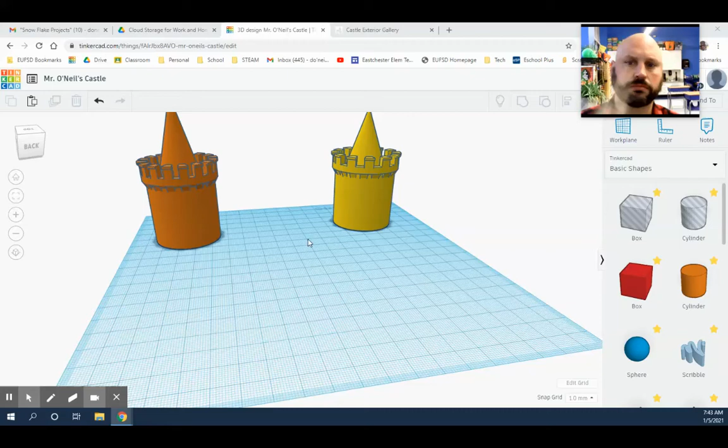Today I'm going to teach you how to make this castle, at least the first part of it. This is what it looks like in Tinkercad, and this is what it could look like. There are different variations, but I'm going to teach you how to make this one.

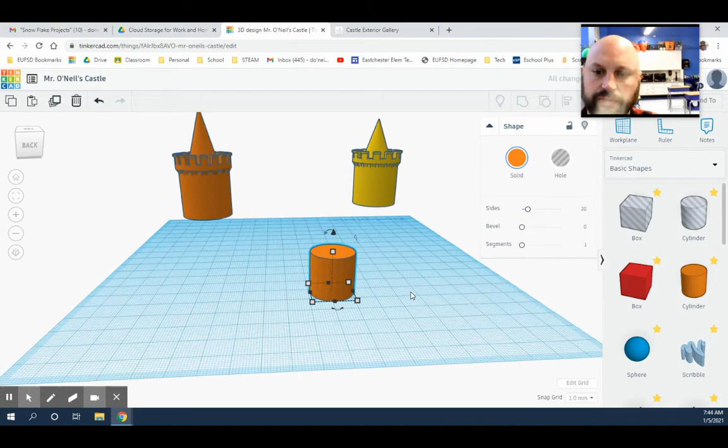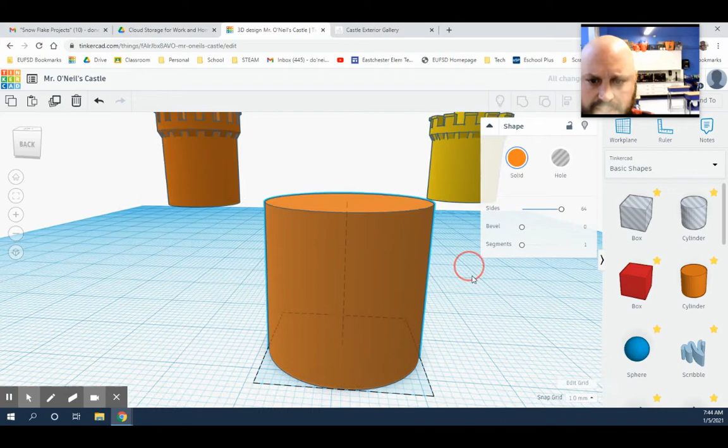First we're going to start out with a cylinder. As I've mentioned before in class, if you look closely, it's not really a cylinder, it has sides. This is actually a 20-sided shape. Since Tinkercad works with an XY axis, it does not have anything that's 100% round. So I'm going to adjust this to 64 sides, and you can see it's starting to look more like a cylinder.

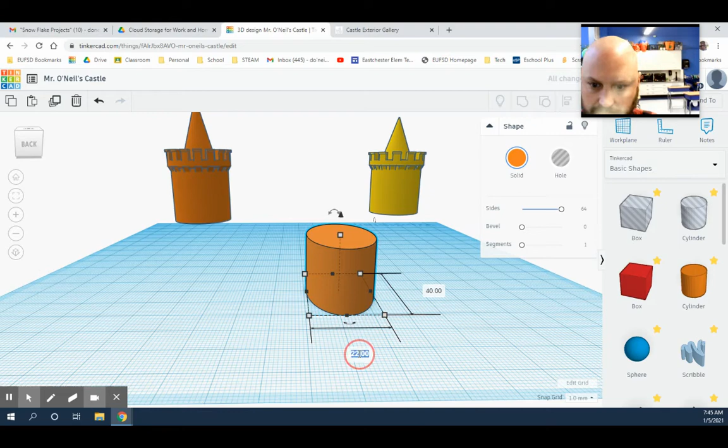The first thing I'm going to do is change my size to 40, 40, and a height of 40. Remember, you can also do that by holding your shift button. If I undo all that, I can hold shift down and pull the corner until it gets to 40, and that will also adjust the height to 40. But you have to make sure you are holding that shift button down.

So that's how we're going to start with this piece right here. That's going to be the base of our castle.

First thing we're going to do is duplicate it. You can do Control-D to duplicate, or hit the duplicate button. Drag this piece out, and we're going to turn that one into a hole. Since this is 40 by 40 by 40, the same exact size as this one, we're going to bring this down to 36. I'm holding shift down on my keyboard and lowering it carefully to 36, then letting go. I'm also going to raise it up right here, the height. I'm going to bring that up, and you'll see why later.

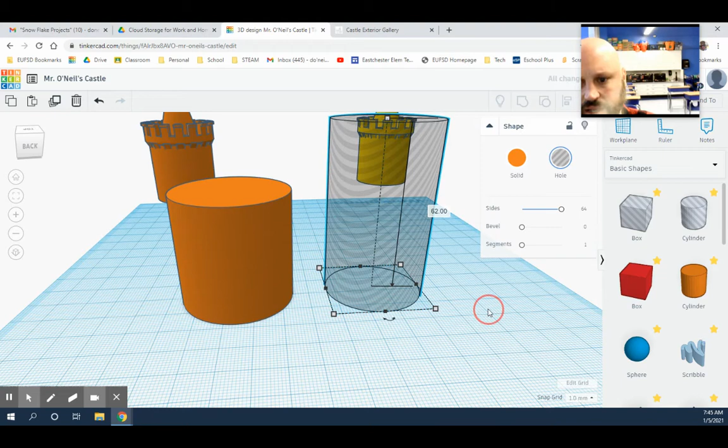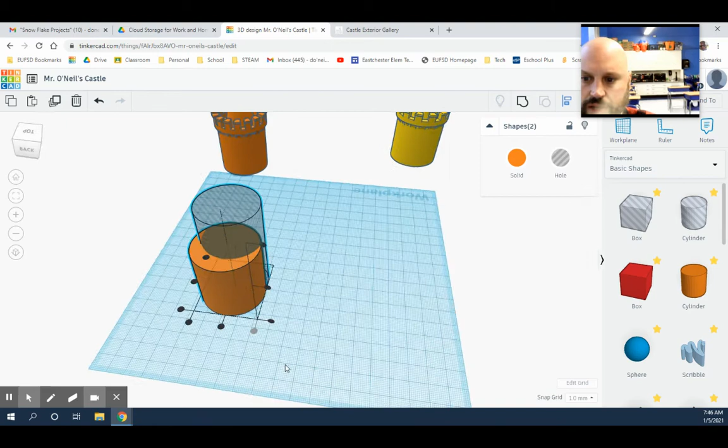Since I want to keep a floor on this, I'm going to raise this off the work plane. I'll go over to my black triangle and raise it up 2 millimeters. Now I'm going to align these two. I'll rotate my bed, highlight both, hit my alignment tool, and hit the buttons in the middle, here and here. Now I'm not going to group them yet, I'm going to leave this over on the side.

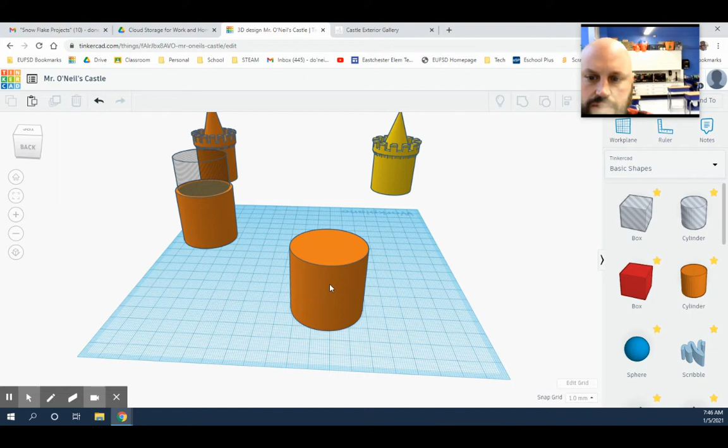But I am going to duplicate one more of those cylinders, so I'm going to bring out one of these. If you want to start with a new cylinder, that's fine too, but you can simply click on this one and duplicate it. I'm also going to duplicate this a second time, so we need 2 more cylinders for this next part.

So this is the base, and we're going to use these 2 cylinders to make the balcony. When you look back at this castle, you can see the balcony is here - there's room for the soldiers of the troops to look down to protect the castle. These little pieces holding up the balcony are called corbels. We're going to also make those.

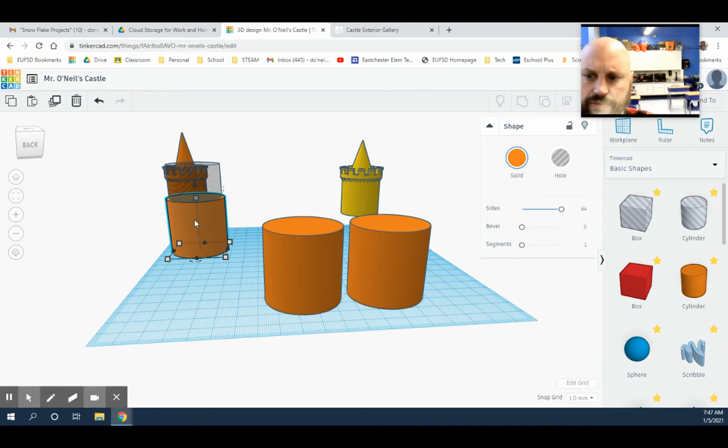Okay, so let's first start with the balcony. The balcony needs to be a little bit bigger than the base. So if the base is 40 by 40 by 40, we're going to make this 44, and bring the height down to 10. So we have a height of 10, and the sides are 44 by 44. If you need to pause the video at any time to work on yours, that's fine.

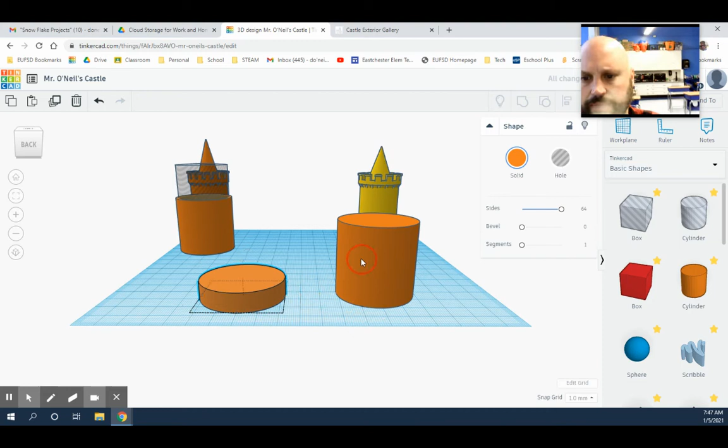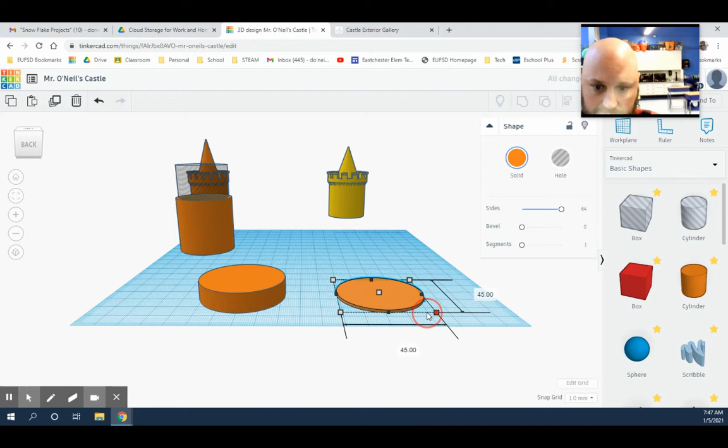Now the cap - these little pieces jutting out from the balcony, this little trim, this rim - that's going to be this piece here. We're going to bring this down to 1. If this is 44, we're going to make this 46, and I'm going to have to readjust that to 1. Actually I should have done that second. So this one is 46 by 46 by 1.

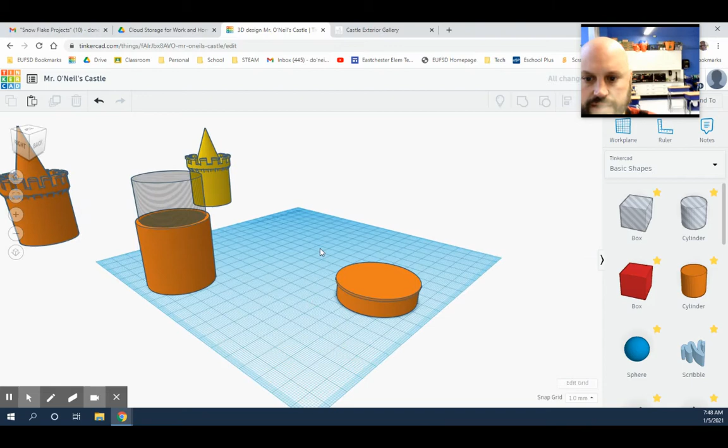Now since this is a height of 10, I'm going to raise this up to 10 - you can see the 10 there. I'm going to place this on top, and align it because I don't know if I can do it by eye. Well, it looks like I did - wow, I got lucky there. But normally you're going to have to align that. It somehow just went right on top. Now you can group it if you need to move it around, so I'm going to group it just so I can move it.

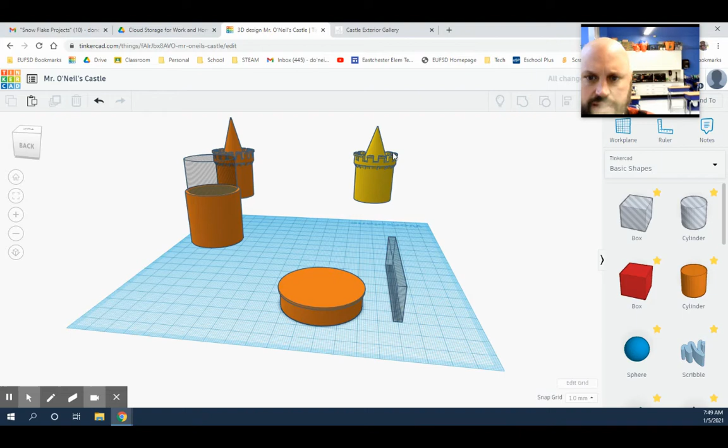And now here's the cool part - I'm going to cut these sections out using my duplicating trick. I'm going to pull out a clear box, and do a length of about, I think, 70 works - it doesn't have to be exactly 70. And then a width of, let's say, 4, because I want to make a lot of those little slits there. Oh, I turned it by mistake. Okay, let's bring that into 4.

Okay, and you notice I'm using the black boxes there to pull it in. If you use the black boxes, you can adjust the width or the length without affecting the other measurement.

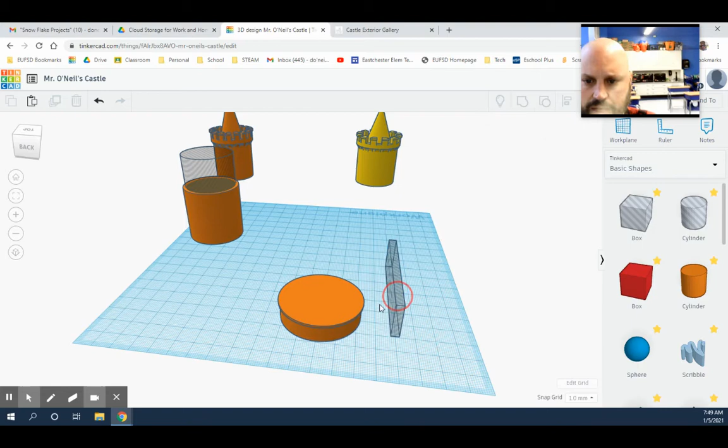Now the important thing here is I want to get this directly in the middle. So when you look down, it needs to be a perfect fraction. If you do it like this, it's not going to work. So let's use our alignment tool right here.

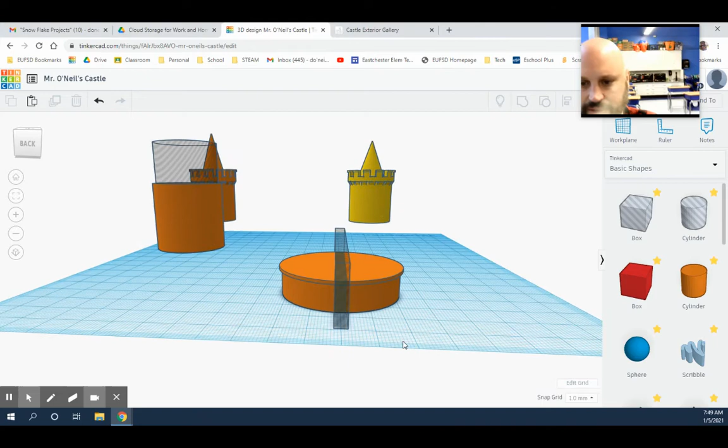Let's make sure that rectangle is exactly in the middle of the circle. And it is. Okay, so now here comes our duplicating trick. Well, wait, one more step. I have to raise this off the ground, because if you see here, I still have a big chunk at the bottom. So I'm going to raise this up 4.

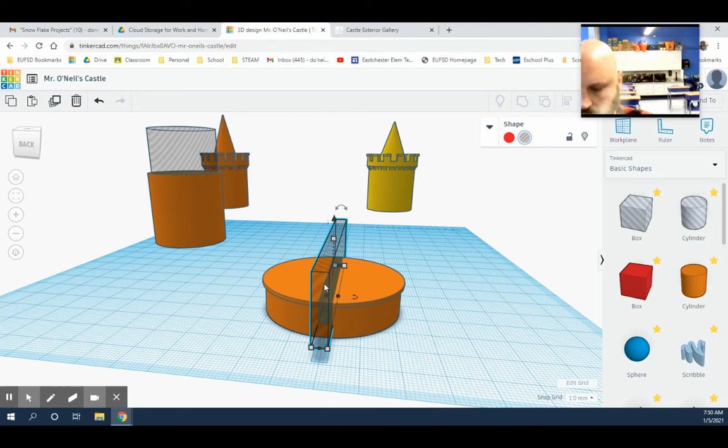Okay, and you can see when you look at it that it's leaving the bottom, it's just cutting the top. So I am going to hit Control D, or the duplicate button, and then I am going to rotate 22.5 degrees, which is the first turn. And then I'm going to hit Control D again and again and again, and it gives me this really cool design. It follows the same pattern.

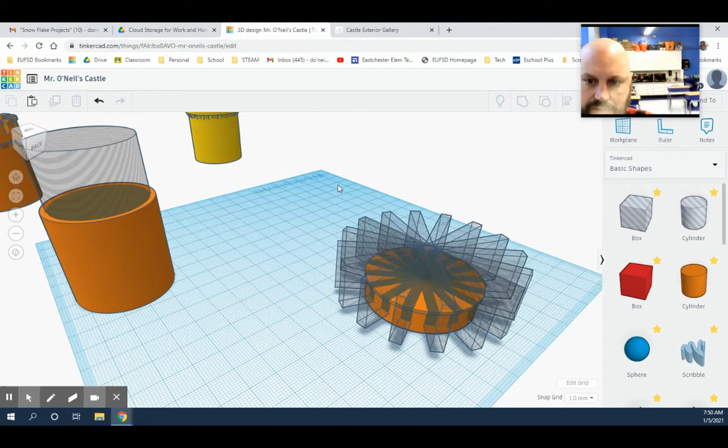Now what's left to do is group it. So let's highlight this and hit group. And bam. All right, now you'll see why I left this piece here.

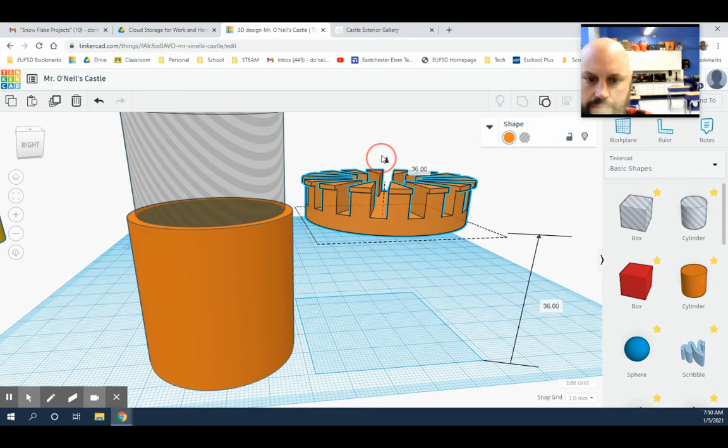Okay, I'm going to bring this over. And remember, we said that this was a height of 40, so I am going to raise this up 40. Okay, that's raised up 40.

I'm now going to bring this in, and of course, align it. Don't do it by eye. Hit your alignment tool. You're going to click here, and you're going to click here. And then you're going to group.

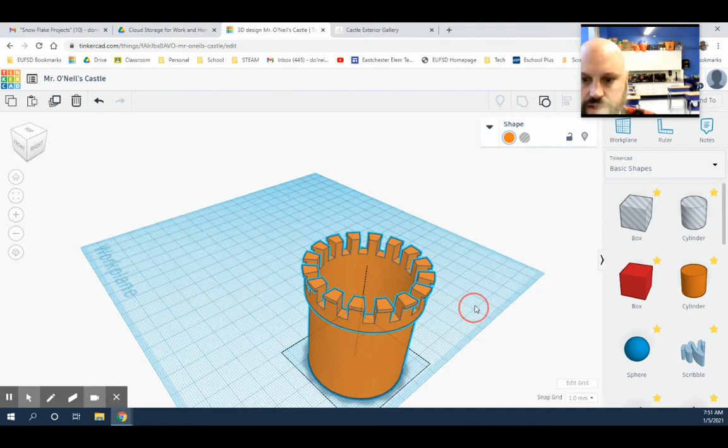And you're going to see that now this circle really carves out the inside that we needed. Okay, now only one problem: your soldiers have no place to stand. And our balcony, if we were to 3D print this, has no supports. If this was a real structure, your balcony would fall down.

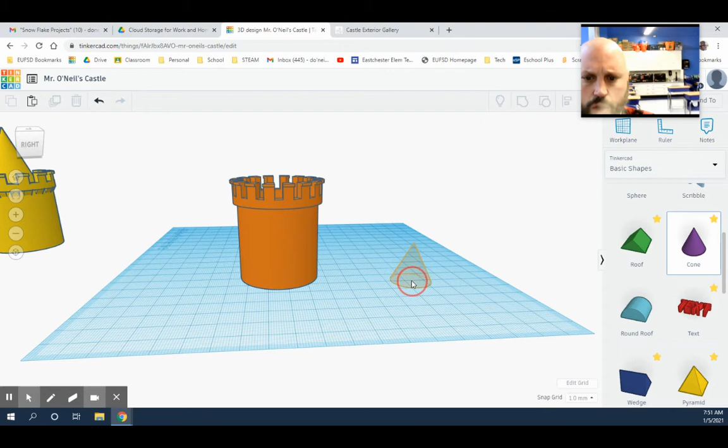Excuse me. So here's how we're going to make the corbels and the floor at the same time. We're going to bring out a cone. Now, just like the cylinder, you can adjust the sides of a cone to make it smoother. I'm going to make it 64.

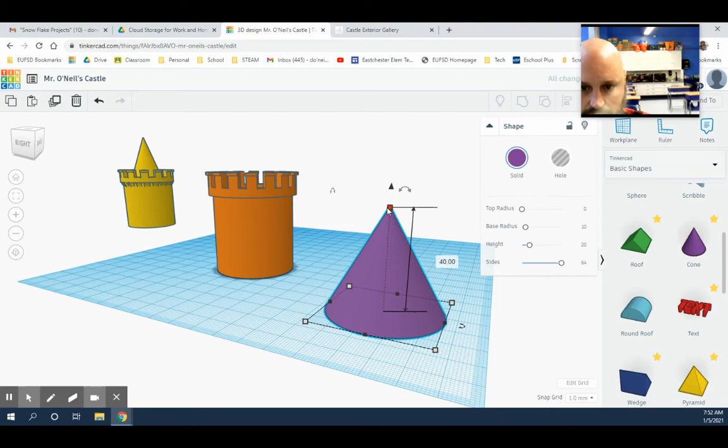Now, the corbel should be the size of the balcony. And if you remember, the balcony size was 44 by 44. But we're going to keep the height at 40. Again, this cone is 44 by 44 by 40. Okay, if you need to pause the video to do that, go ahead.

We're now going to flip 180 degrees. Now you can do this manually, or you can click on the arrows and type into the box 180 and hit enter, and it flips it over a complete half turn.

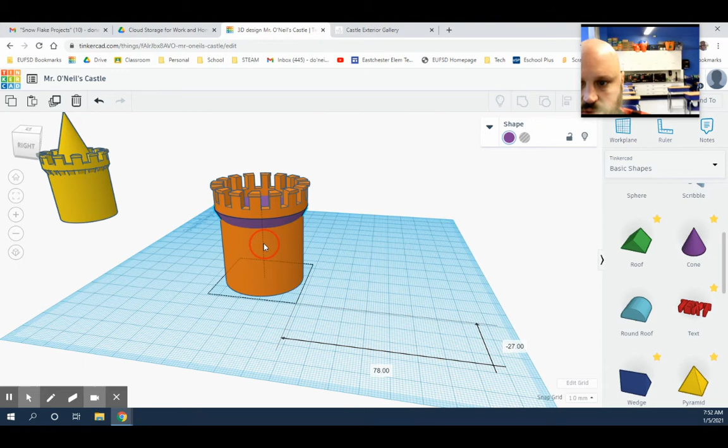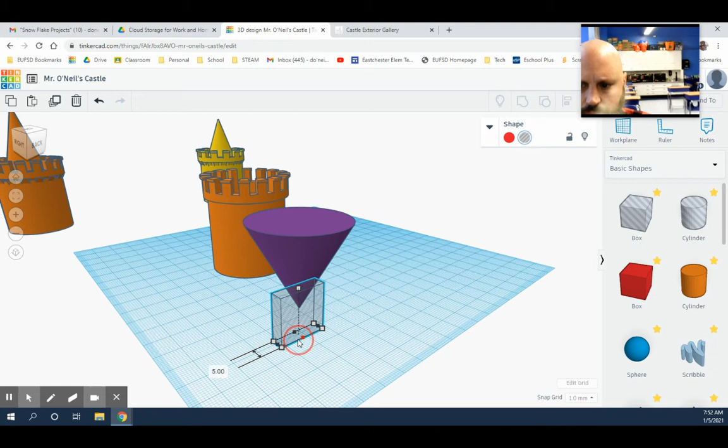So here's what we're going to do. We're going to use the same trick. I'm going to bring out a box. I'm going to again adjust the width to about 5, and I'm going to adjust the length to about maybe 70.

Now what I'm going to do is align it directly in the middle of this cone, right here and here. And you can see it's directly in the center, and that's really important.

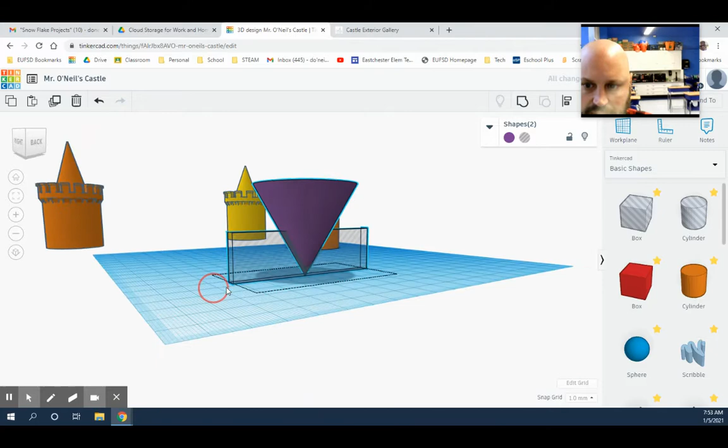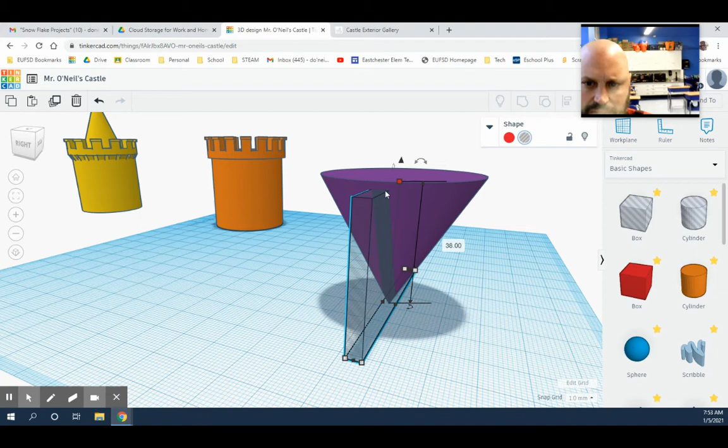I'm going to leave that on the ground, but I'm going to raise the height, and I'm going to raise it to right underneath the floor. I want to leave some of the floor, but cut most of this off. The height is up to you, but I'll tell you my height there is 38. So if it's 40 high and this is 38, that means I have a 2 centimeter or 2 millimeter floor, which is fine.

All right, so click here, Control D to duplicate, turn 22.5 degrees, and then hit Control D again and again and again until you go all the way around.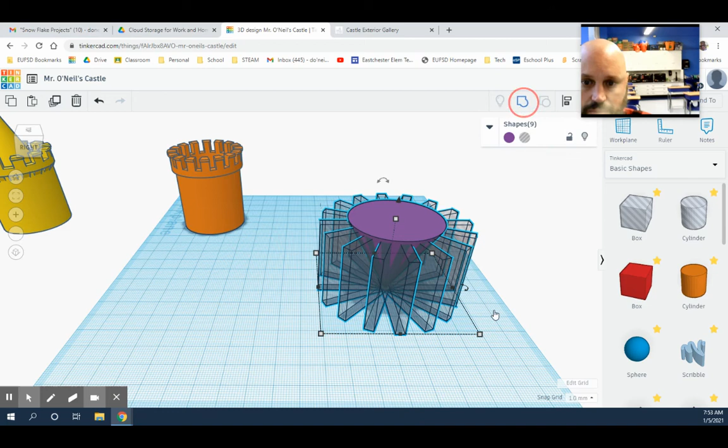All right, now I'm going to highlight these and group, and I'm left with this really cool looking shape.

Now, watch what happens when I align them. I'm going to click here and here. Oh, I missed that last one. Right there. Okay, and I have my floor.

I have my nice stylish corbels, and I just need to group this.

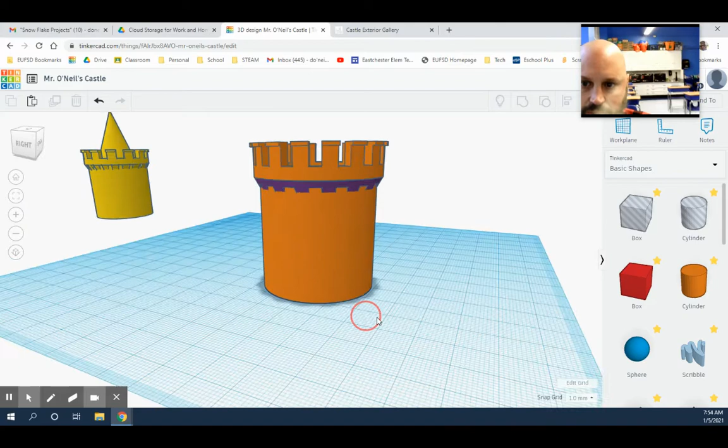Okay, and then the last step is going to be the peak, which we're also going to use a cone. And this, we've decided, should be about 25 by 25, and then the height can really be up to you.

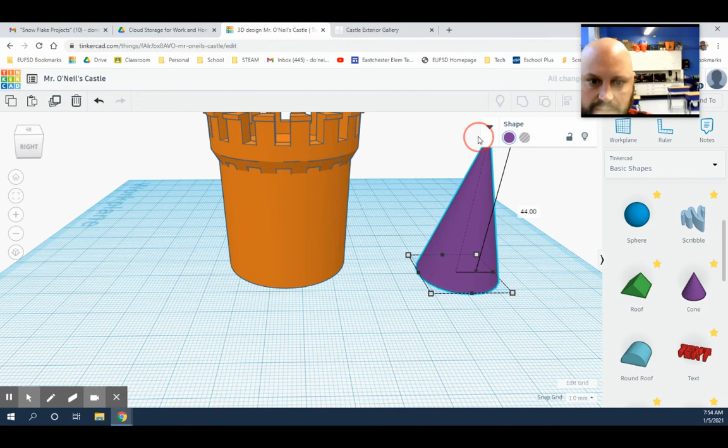Okay, if you want to have a nice high peak, raise it up. If you want a low peak, that's fine too. All right, we're going to raise this up 40, because that's where the floor is.

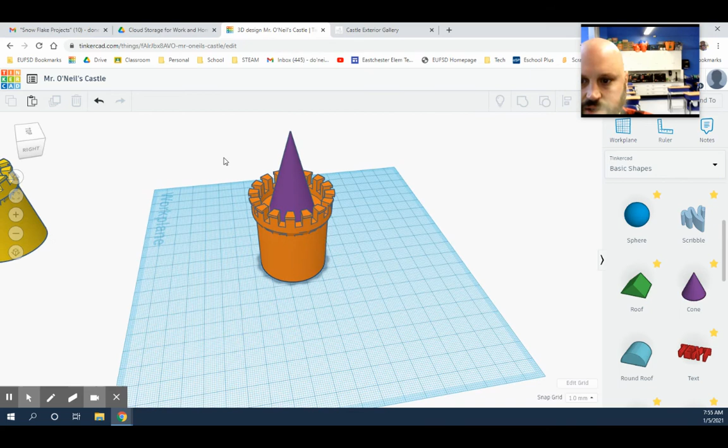We're going to bring this over, and we are going to align it so it's right in the center. And we want to look from the top to make sure there would be space for the troops to walk around, and it looks like that would be good. So I'm going to then go and group that.

Okay, so this is castle lesson number 1. And next week, we will be learning how to combine several of these. Take 2 of these and put a wall in between with a door and windows. All right, hope you enjoyed this, and good luck.